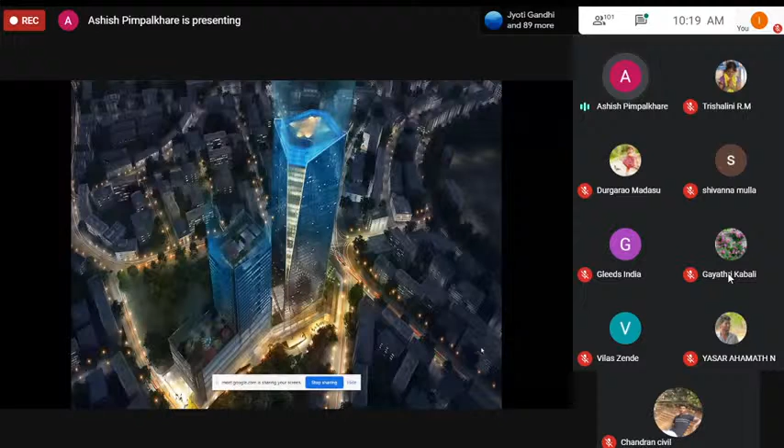This is a development by Godrej Developers, a team which has 2.5 million square feet of A-grade commercial offices, a 200-key 5-star hotel operated by Taj Group, and roughly 2.5 million square feet of residential development. This is the world-class 2.7 million square foot Kohinoor Square project in Dadar, Mumbai. All these are world-class buildings, built within time schedules and budgets in millions.

Most importantly, all are executed in collaboration of multiple stakeholders: the owners, the architects, the structural consultants, the contractors, the cost consultant, MEP consultant, vertical transport, and multiple other consultants. It is a joint effort of all these stakeholders, and in the absence of any one of them, it would not have been a success.

QS is one of the essential parts of the project team: the builder, the quantity surveyor, the engineer, the PM, the client, and the architect. All these stakeholders contribute to the success of any project.

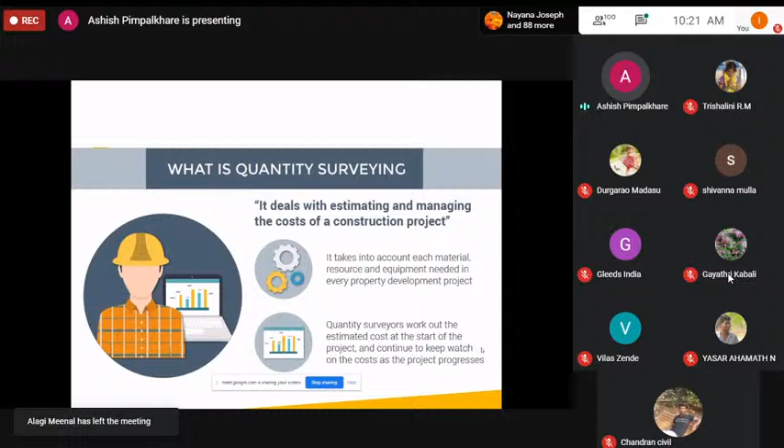So what is quantity surveying? It deals with estimation and managing cost of construction projects. It takes into account all the material, resources, and equipment needed for development of the project, and quantity surveyors work out the detailed estimate cost and continue to keep watch on project costs even during execution—that is, monitoring of costs during execution.

Why quantity surveying? If you have a knack for numbers and maths, are more into logic, and don't want a job that is too rigid—there are certain jobs people don't want to have—then you can opt for quantity surveying. The pre-contract part is mostly an office job, and the post-contract part is site-based, but mainly site office-based work, and it offers an intelligent and challenging career.

What are the key skills required? A good foundation in IT and mathematics, with clear concepts and logic. You must be able to learn and adapt in a fast-paced environment, and have good interpersonal skills.

The roles of quantity surveyors include the traditional role of measurements from drawings, pricing estimates, rate analysis, bill checking, and claim management. Further, during procurement, tender documents and submissions.

What will be now and in the future? Dynamic cost, faster and more complex changes, technology, claim management, BIM (building information modelling), life cycle costing, and multifaceted procurements.

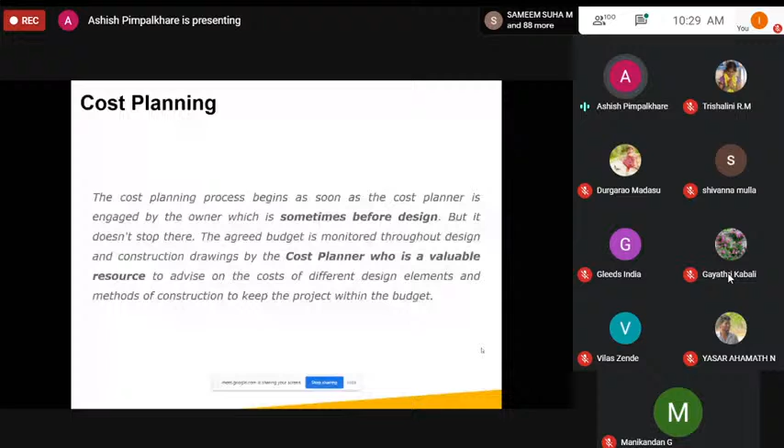That is in the post-contract scenario. Again, the cost monitoring is done throughout the end of the project.

Otherwise, the contractor will take us for a toss. He will make extra claims. He will overrun the budget, and all claims will come, which will be difficult for a client to manage.

After the owner has set a maximum cost, planning will determine whether the cost cap can be met. If not, then the project is not feasible. Then the current state should be reworked to reduce cost.

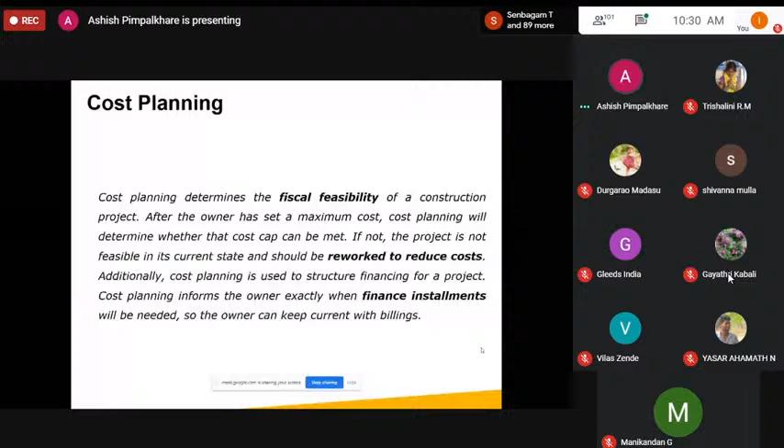As I've told earlier, if the cost is not working - see, architects have aspirational values. They will design to their aspirational values, but every time rework needs to be done.

What are the different reasons? Better and in-depth understanding of property and access to historical information. He is doing the projects since past so many years, so he has a lot of data for similar nature projects - what were the costs there, what costs have been incurred.

What additional extra items have been incurred from alternative building materials, methods that can save time and money - architectural, but we as a cost manager should see whether it is within the budget and saving time and money.

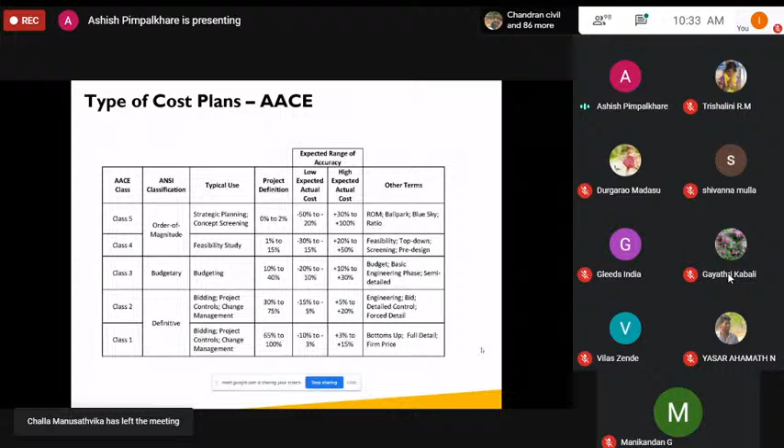So what we follow in India is cost planning based on order of magnitude cost planning, cost per square feet, or sort of estimates which are at the feasibility level. Then comes the concept stage.

Then comes the concept stage. Early stage design is developed, areas are available, and through benchmarking information and similar projects plus abnormal items, the cost plans are developed. So then comes the schematic stage estimates.

Schematic stage estimates are defined from the look and feel of the design, and first detailed design measurements are done at this stage, and cost estimates are prepared, including the contingency and escalation.

So concept stage, if you see, you will get accuracy of plus minus 10%. Schematic stage, when you come, you get accuracy of plus minus 7%. Then detailed design stage estimates.

Detailed design is approved by all the stakeholders, including the owners, and then measurements are done on that, and market check of rates, whatever specific requirements of clients and value engineering options, all those have been worked out, and the estimates are developed. And the accuracy level, what you get at design development level is plus minus 5%.

Then the tender stage cost estimates. So tender stage is the good for construction usually, or which are almost close to 90-95% of actual construction. So typically used to compare against contractor's estimate and reduce contingency. And the accuracy, what we get at tender stage cost estimate is plus minus 2 to 3%.

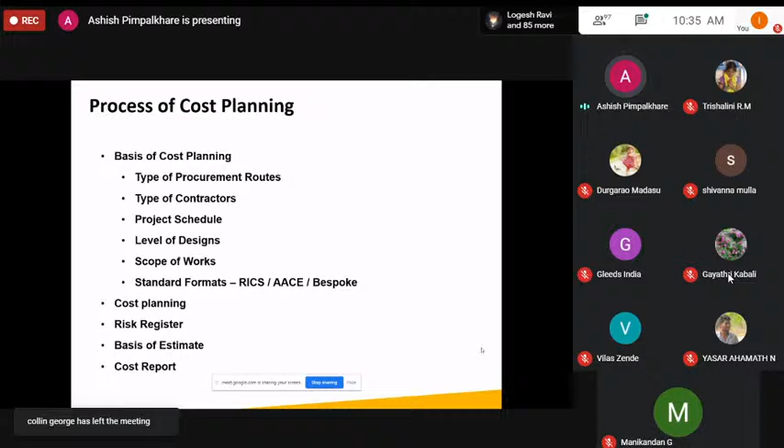Next comes the process of cost planning. So what is the basis of cost planning? The type of procurement routes, type of contractors, project schedules, level of design, scope of work, standard formats, RICS, AACE, or bespoke form of contracts. Then the cost planning, risk register, basis of estimate, and cost reports. These are the cost check during the design development. So I'll not go into details, but you can just have a look at the flow chart for this.

Coming to key cost drivers. What are cost drivers? Cost drivers are the elements which drive the cost, and these affect a lot when we want to do the costing, since cost drivers are the major factors affecting the cost.

So first one is the project positioning, market or project feasibility studies. Whether the location of the project is low cost, or the neighborhood is low, or it is the mid-market segment, or the upscale segment, whether it is a luxury project or upper luxury.

Then comes the project standard and specifications, whether it is a branded project, city-based owner or developer project, national owner or developer project, international chains, soft alliance, standalone or boutique developments.

Next comes the location, abnormal ground and surrounding conditions, whether the terrain is very high, lot of cut and fill is required. The location factor, whether it is a metro zone or a non-metro zone, tier 2 city, tier 3 city. Then comes the building shape and area programming.

Area division between the components, mixed use development, whether it is a township, whether it is a standalone, whether it is a mix of retail and commercial, including the multiplex, all those factors.

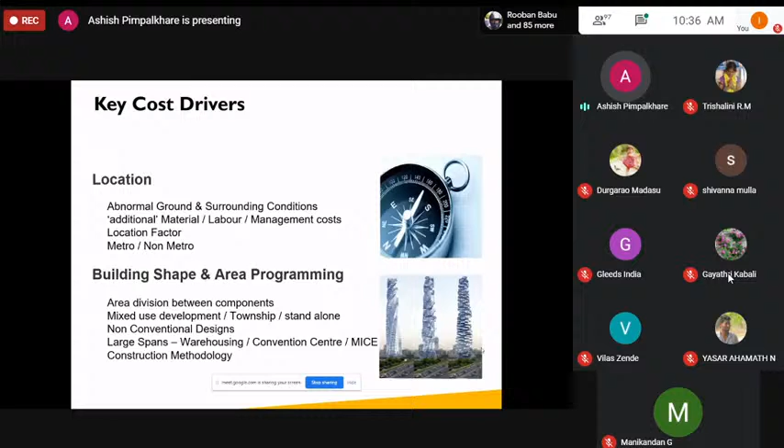Then non-conventional design, as can be visible in the picture, whether the project has large spans, warehousing, convention centers, columnless structures, and the construction methodology to be used for construction.

Next cost driver is the type of structures, remediation of existing site conditions. Then whether depending on the earthquake zoning, the cost drivers will vary. Zone 2, zone 3, depending on the foundation, type of foundation, whether it is isolated footing, whether it is a raft footing, whether it is a pile foundation. These are the major cost drivers deriving the foundation cost.

Then the framing option, whether it is a shell and core, whether the slabs are PT slabs, post tensioning, whether it is a flat slab. Then the fire protection norms. So whatever local fire protection norms, these also are the cost driving factors for arriving the budget.

Then the building heights. There may be certain restriction because of the aircraft, air movement, funnel movement. So that also governs the cost drivers for deriving cost.

And the parking, whether it has structure as a basement, whether it has a podium parking, whether it has multi-level car parking, and the shape and framing and location of parking, multi-stack combo puzzle park or regular stack car park. Last one is the automated car parks. All these govern the cost of parking in the overall budget.

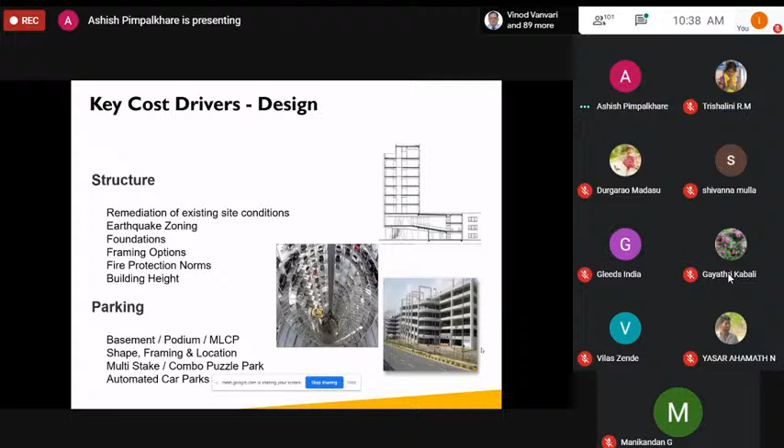Then the next key driver being the facade and heights, type of facade, shape of building, the elevation factors, height premiums, floor to floor heights, sustainability, additional preliminary and overheads, and vertical transportation. So the chart below shows you different plan sizes wherein the areas are different, but the perimeter for all the buildings is coming as same.

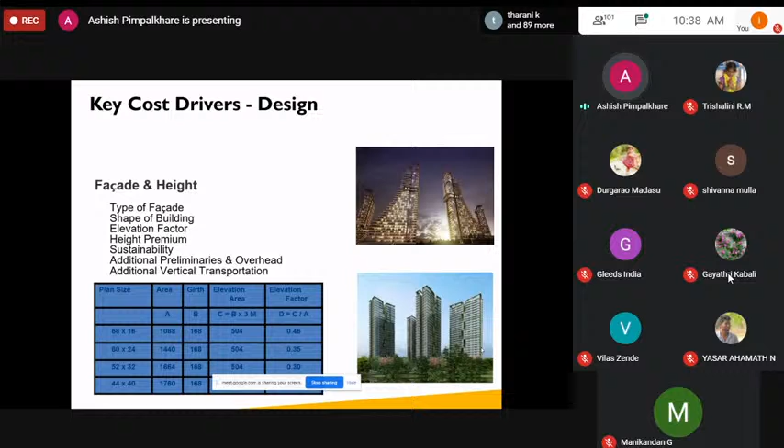And when you see the elevational area, which is the facade area, perimeter into height, 3 meter is the assumption. And if you consider the elevation factor, that is elevation area divided by the plan area. So least 0.29 which we are getting, that will be the most economical one.

And next cost driver is the area configuration. Whether it is a residential development, apartment, there may be different type of apartments, different type of flat typology, flat matrix, a 2 BHK, 2.5 BHK, 1 BHK, 3 BHK, and the parkings.

In case of hotels, there will be different types of rooms, whether it is a king suite, queen suite, or single room. Then front of house areas, back of house areas, which are the cost driving factors. In hotel, the restaurants, whether it is a signature restaurant or a display restaurant.

Coming to retail and commercial projects, the parking areas, because usually for retail and commercial a lot of people will come and a lot of parking spaces are required. Then the carpet area, ratios of carpet area to parking areas, the common areas, corridors, lift lobbies, and what all facilities are to be provided.

Warehouses, the cold rooms, the standard office spaces, all these are the cost drivers. In case of office, the open spaces, whether it is a back office or a front office, all the costs depend on the utility of the offices.

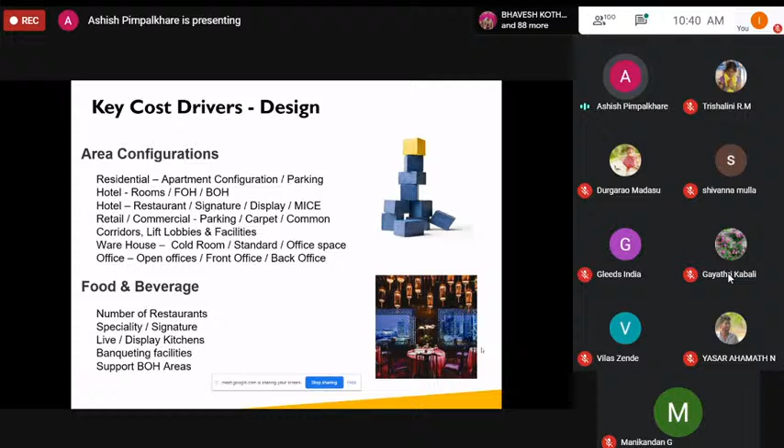Next, cost drivers for food and beverages: how many restaurants are there, whether it is a signature restaurant, a specialty restaurant, whether live display kitchen counters are there, and whether banquet facilities are there. Banquet facility means you will require more parking and support for all the back of house areas.

Next cost driver is building services and IT integration. Distance from the grid - how long you will require the building electricity line to be drawn. If the nearby power station is 10 kilometers away, you need to factor the cost of laying that 10 kilometer line also. Then the power requirements, amount of energy, and power backups.

MVAC systems for heating and cooling, MVAC for building volumes. Then the fire protection norms, whatever fire protection norms are stipulated for that region, all those govern the cost. Then the BMS, building management system, and low voltage systems such as fire alarm, security, IT integration, life cycle cost, and security. All these are the cost drivers for building services.

Coming to interior finishes and fixed furniture and equipment, driven by interior designer and operators - whatever design they provide, you need to factor all those things as a cost driver while budgeting any project. Designing to budget, availability in local markets - all the materials suggested, if they are available in the local market, that will be the cheapest option. If you need to import, then the costs are going to increase. Then the recommended makes, and if recommended makes are not available, what alternatives we are having.

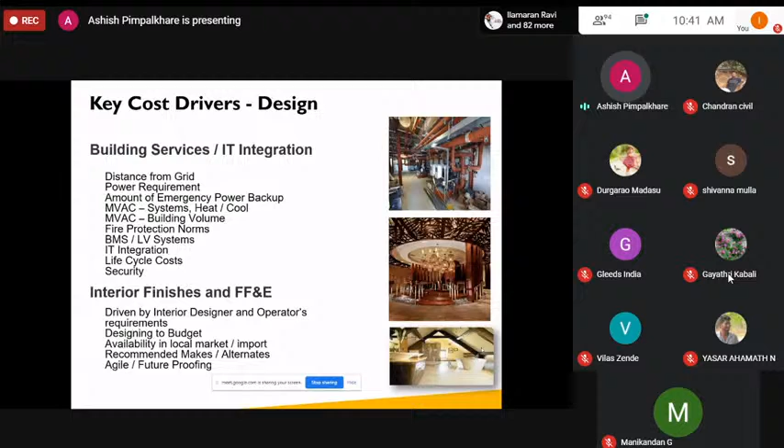Then the agile and future proofing of buildings. And again, key cost drivers are the project schedule - whatever timings required for approval and permits, the design development, procurement and construction stage, pre-opening, and time overruns.

Prolongation of project duration will lead to a number of claims. The overheads will increase, there will be more design alterations, forex fluctuation will increase. Initially the duration was 36 months, and if it prolongs to say 48 months, whatever material we need to buy through foreign exchange, again that will be delayed, and the cost of forex will increase.

Late revenue generation - so the developer has agreed to lease and has signed lease agreements with certain clients. In that case, because of prolonged duration, he will be able to hand over only at a later stage, leading to loss of revenue for the developer. Then the financing cost - interest on financing cost goes on increasing if the project is delayed.

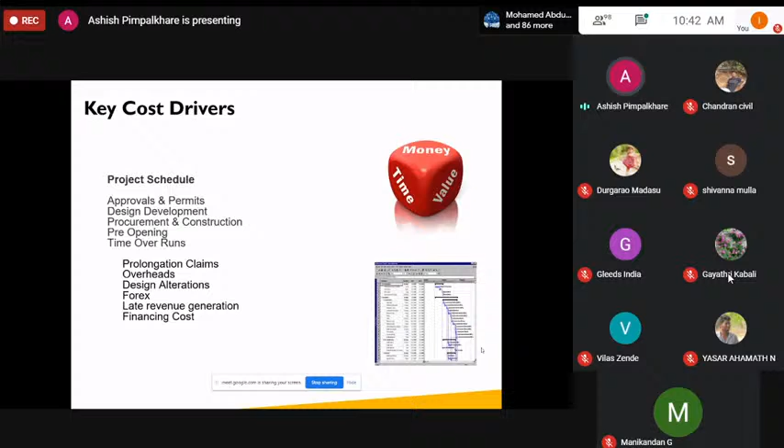The next cost drivers are finance - structuring costs, currency risk, debt equity ratio, and repayment schedules. Then next cost driver is government taxes and levies - the GST, labor cess, import duties, SEZ, whether it is an SEZ zone, then there are certain levies on taxes, EPCG duty schemes.

And the site development, overall site area - whatever site development means, apart from building footprint area, what all covers within the compound wall, that development of that area comes in site development. The connectivity to main roads, whether direct access or we need to do separate access, then cost is incurred for that. Extent of site development, podiums and extended decks, the various water bodies which are provided by the landscape consultants.

That governs the cost for the entire budget. And any special aspirations such as golf courses, if these are there in the project, definitely will add up to the project cost. Then cost driver is the procurement strategy - that is construction procurement, global procurement, annual rate contracts, bulk purchase, reverse auction technology, time criteria for delivery.

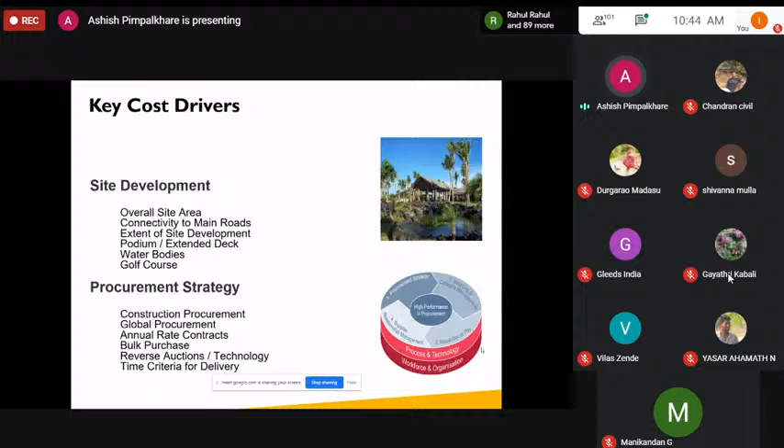Then factors affecting procurement: time, cost and quality. Time - speed of program, phasing of projects, cost certainty, overall cost, and ease with which changes can be affected. And quality - that is the overall quality control over the design process, quality and design, quality control over the quality of construction.

Factors affecting procurement are the economics, general level of tender activities, and market conditions. Currently, diesel rates have increased very high, so all these factors govern procurement. Then there's micro market tender activity, project specific factors, project sector, size of project, client type—whether it's a project client or a developer—risk appetite, and pool of suitable contractors.

Various procurement routes: the first one is design-bid-build. Here, the design is developed by the architect, tenders are called for bidding, and the entire project is built.

Then the main or general contractor route. The general contractor is given the shell and core works and all other packages such as services, facade, security, fixed furniture and interior, and external development packages, and is paid a nomination charge. All these vendors and sub-vendors become nominated subcontractors under the general contractor.

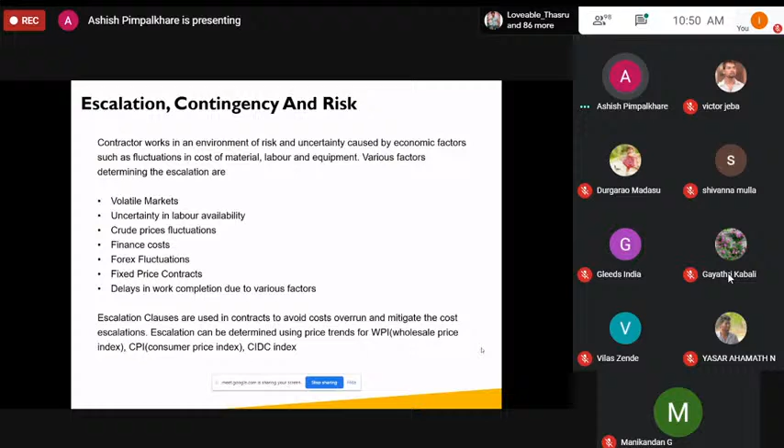Escalation can be determined by wholesale price index, that is WPI, using the RBI formula, then the consumer price index, and CIDC, Construction Industry Development Council indices.

The different types of contingencies are design contingency, covering design changes that happen before the project and even during execution. Then comes construction contingency, which involves unforeseen things that happen during construction. Then is management contingency, which includes all the management overheads and costs.

Contingency usually excludes major scope changes such as changes in the end product, capacities, building sizes, and location, and extraordinary events such as major strikes, the pandemic which is going on, natural disasters, escalation, and currency effects. So this is how the contingency is broken down into multiple packages.

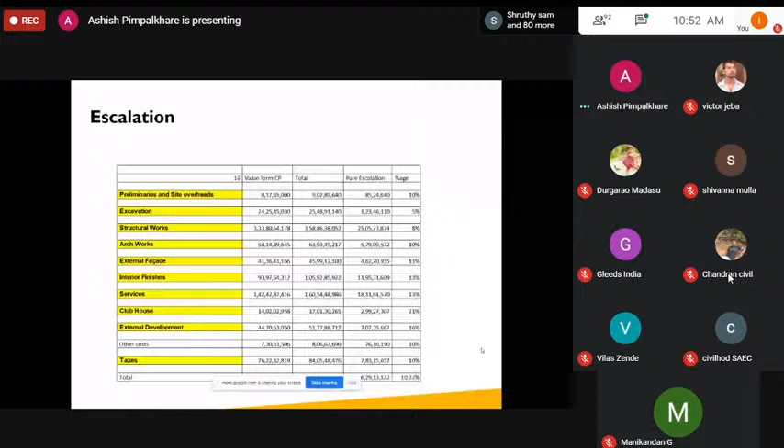Then the risk register. The cost manager is the one who needs to identify the risk, even at the initial stage, that is the pre-contract works, and even during the post-contract works, that is during execution.

For example, I will give a pre-contract case. Certain times developers or builders are in a hurry to launch their projects, because once they launch the project they start getting bookings and revenue starts coming in. But the design is only at schematic stage, so that is a major risk. The tender should be floated at design development stage, which is almost 80-85% of the final design, so before that it is advisable not to float the tender.

Coming to post-contract risk, if the excavation package is given to a separate contractor and shell and core work is given to a separate package, then as cost manager we need to ensure that before the shell and core contractor comes into picture, all excavation works are completed. Otherwise, once the shell and core contract has been awarded, his labor and material will be sitting idle, and he will start his claims against that.

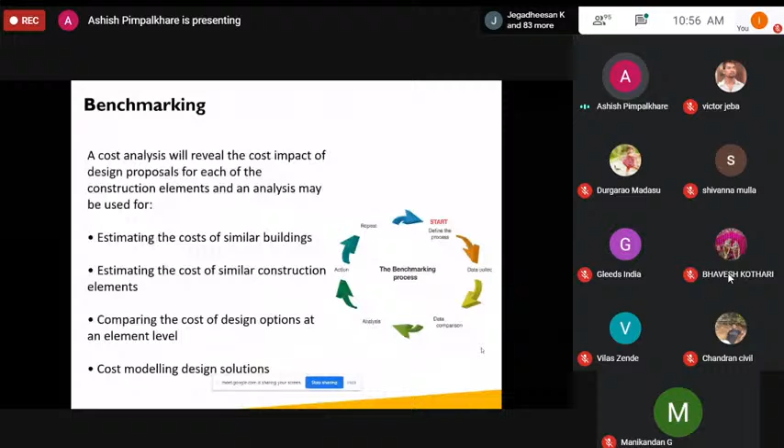Coming to the tendering process, this is an example of pre-qualification. We need to do pre-qualification of contractors.

A tender event schedule: what will be the schedule of the entire tender? It is to identify and freeze procurement routes, freeze the list of potential contractors, pre-qualifications, preparation of tenders, floating tenders, pre-bid meeting and site visit of contractors, submission of quotes, evaluation of quotes, negotiations, revised offers, further negotiations, approval by client, and final award.

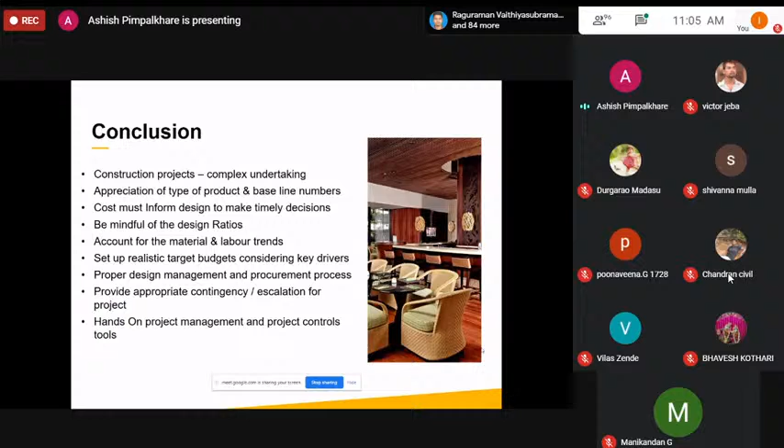Even if client is saying I need to fit budget in 2,500 per square feet, and if as per the design project it is coming to 2,800, you need to tell clearly on his face that you need to change certain designs or certain aspiration factors, otherwise it is not going to fit in 2,500, which is your expectation. Proper design management and procurement process, provide appropriate contingency escalation for projects, and hands-on project management and project control tools.

Just before going to question and answers, with my experience I would like to advise all students this: in your life you will come across various tasks when you start your career. There will be people who wish always that the task happens, there will be people who want the task to happen, but you should always be the one who will make the task happen. So be amongst the one who will make the task happen. Best of luck to you all for your future careers.

Okay, so welcome all of you. Now, whatever I'm going to tell you, it is my experience of the last 20 years handling post contract. Many of these things you would not find in books or on social media. But this is prepared from my experience, and if you implement this system and note it down, I will give you one or two minutes in between, then you will definitely be able to do the best job.

So all of you just imagine for a while that you have completed your work and education, and now you are going for your first job, which is a good project. Say a 7-storied or 10-storied building, and you are appointed as a cost manager or junior cost engineer on that project. Just imagine for 2 minutes, then we will start so that you can relate to my slides.

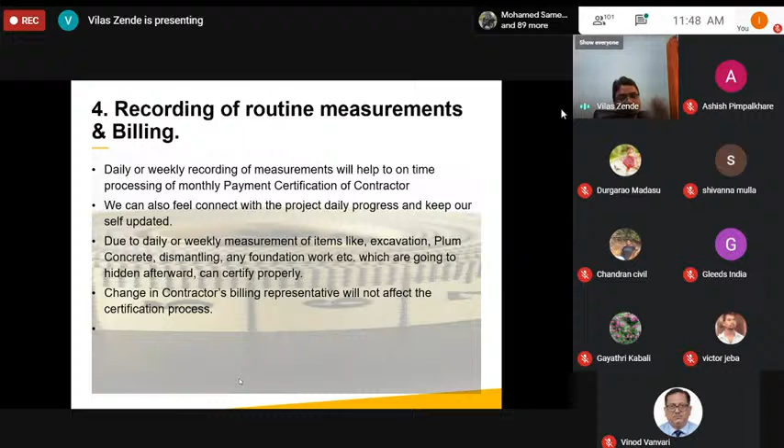So this entire billing process is an activity of 7 to 10 days for each month, and recording of the measurement is a routine activity, right?

Now we will come to point number 5, validation and evaluation of the rate approval for the extra item. Okay, we will go point wise.

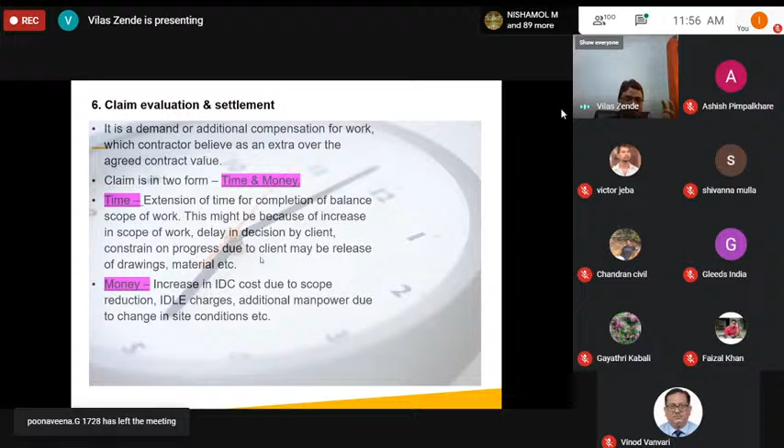Then while evaluating this, how to evaluate the claim, this is the key point - how you evaluate the claim given by the contractor when you are on that project as a quantity surveyor. You have to check the work order, then purchase order, tax invoice submitted by them, accounts ledger, gate entry. You have to ask the contractor to submit the gate entry if that material comes to the project.

Then quotation - you have to ask them to take a minimum 3 quotations from the market for whatever rate they are quoting as an extra claim. Then ask them to submit the rate analysis so you can check point by point. Also the standard task work data, you have to ask them to submit. Then mandays consumption - how many mandays were consumed for that particular extra item. Then material constant also. So if you ask the contractor to submit all this relevant data, there is a 99% chance you can derive a very accurate and legitimate cost.

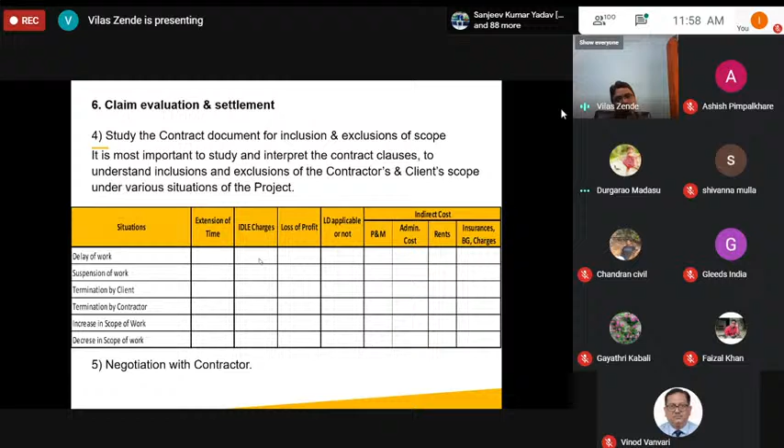This also I told you, risk assessment report. Whatever risks are going to occur on the project, you have to highlight it. For example, suppose cement or steel price is going to rise in some days, then you can intimate the client that if they are procuring that material, kindly procure it early. Otherwise cost is going to escalate and you may spend more. Or if there's any extra item or design not settled by the designer which causes delay or affects cost, you have to highlight that too.

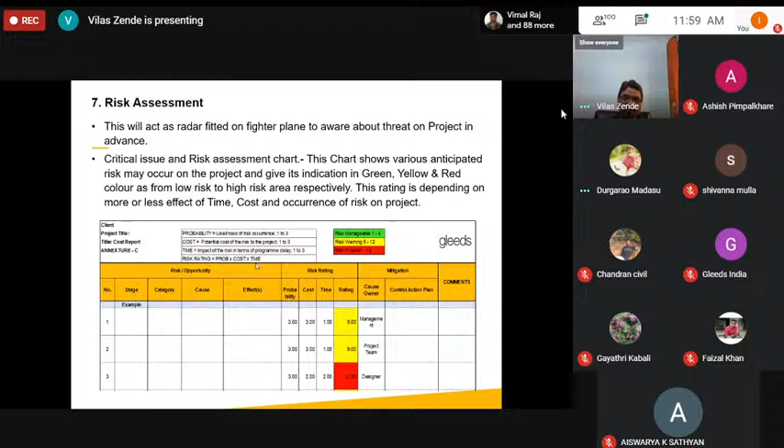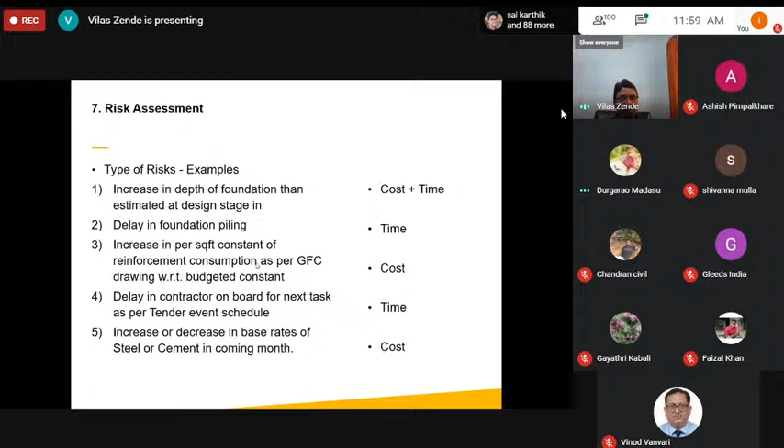There are many things. The risk assessment is based on time and cost. Just as I showed the example, increase or decrease in rates of steel has a cost effect. If there's delay in a new contractor coming on board, getting delayed by the contract department, this impacts the time. So this risk assessment report should clearly show the cost and time effect, right?

Now this cash flow, this is really detailed. We will not go into the detail. Only you have to understand that cash flow means you have to bifurcate the packages of the entire project value. And while progressing, you have to show how much cost is incurred and what cost is balance, right? Suppose a 100 crore contract.

In the first month, second month, third month, fourth month, fifth month - say you are in the fifth month - you have to show what cost is consumed, what cost is balance, and whether it is on time or not. That means in an 18-month project duration, if in the fifth month there should be cost consumed of suppose 10 crores, but actually only 7 or 8 crore is consumed, right? So you have to show the lag on this cash flow also.

Why do you have to show this cash flow? Because the client or owner should get aware of what budget is balanced and how much cost is going to occur in future. This cash flow is based on your project schedule. So whatever project schedule you take from the PM, you have to link the cost with that schedule, so the client knows how much cost they have to pour into the project in the coming days, so they can make arrangements for that, and also take note of any extra cost they incur, right?